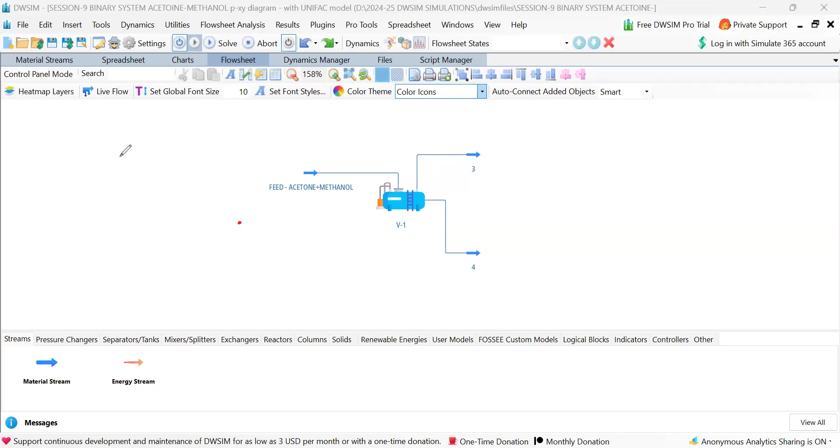Yeah, welcome again to this particular session on DWSIM simulations. Let me take another color here. In this session, we will look at how to generate the PXY diagram, keeping temperature as constant. So this becomes isothermal VLE, isothermal vapor liquid equilibrium.

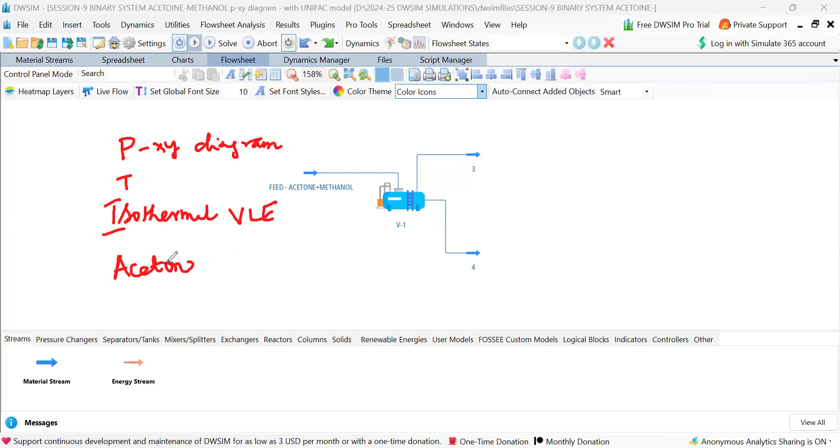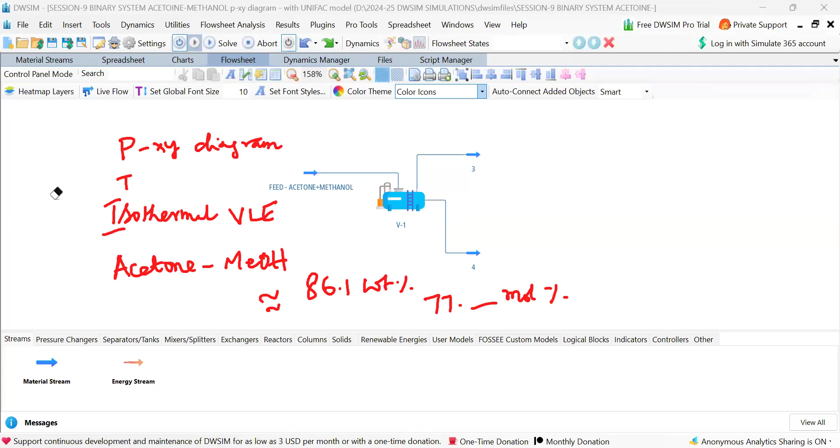In this, as you all know, the system we are working on is acetone plus methanol. This forms a minimum boiling azeotrope, as discussed earlier in the sessions, and the azeotropic composition came up to around 77 some mole percent. This we have checked with UNIFAC as well. Now, going ahead, let me erase these things here for clarity. Yeah, done.

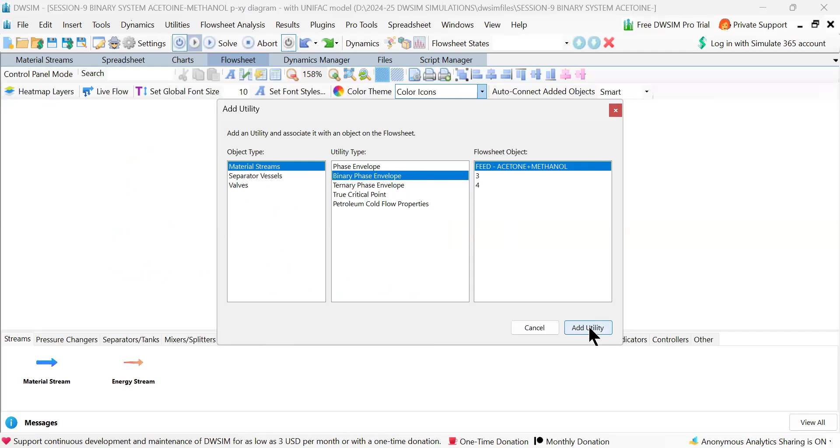Now let me go to utilities, add utility, material streams, binary phase envelope, and the feed stream. That is what we have to choose. Compound one is acetone, compound two is methanol, and we want to choose the PXY diagram. Now the temperature is constant, and the pressure changes and x and y are generated.

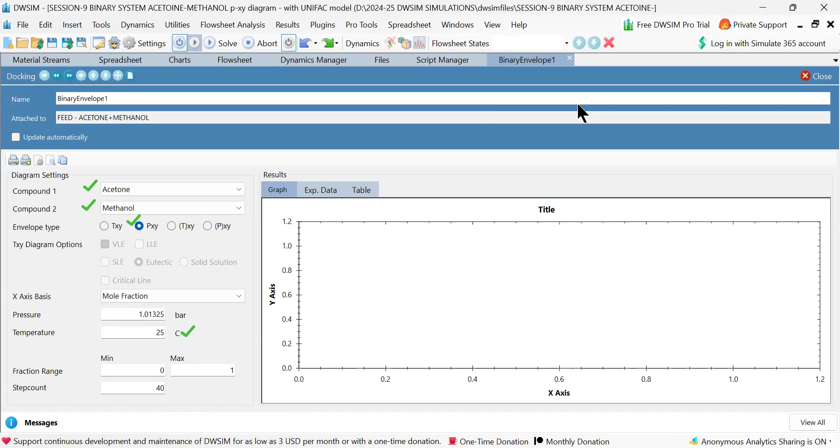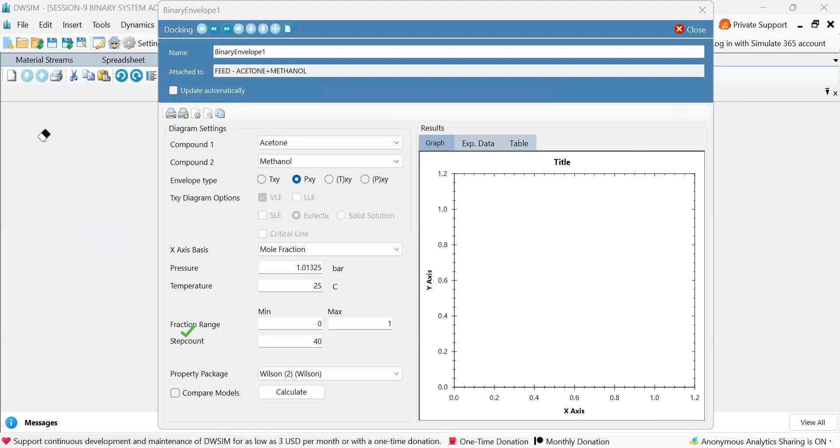Now, you want to see this whole window here. Let me grab out this binary envelope window. See, this is taken out. Slowly adjust this window, it depends upon the version. Now if I move this window up and down, at the bottom here, there is something called calculate.

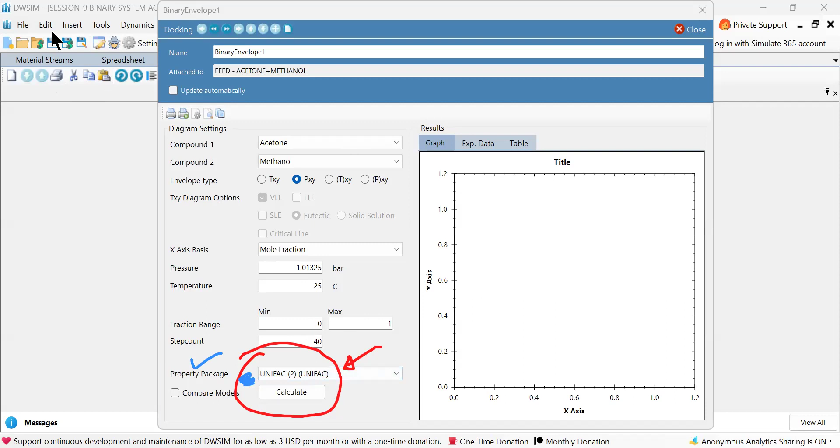In the previous session, we came up to selection of the thermodynamic model also. Not Wilson actually, we have to choose the UNIFAC model. So let me select the UNIFAC model because that is giving us the correct result as per the literature. So this is the property package, and now we are ready for the generation of the diagram.

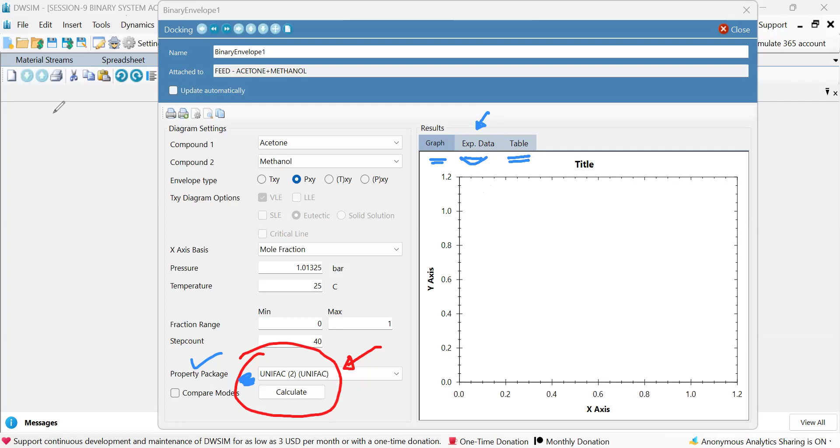And one more thing. After we generate this, there is graph, and experimental data. We are not having experimental data; we are generating directly from the model. We can also see the table. If you do experiments, you can give the data and then do some regression. Now, let us arrange all these things.

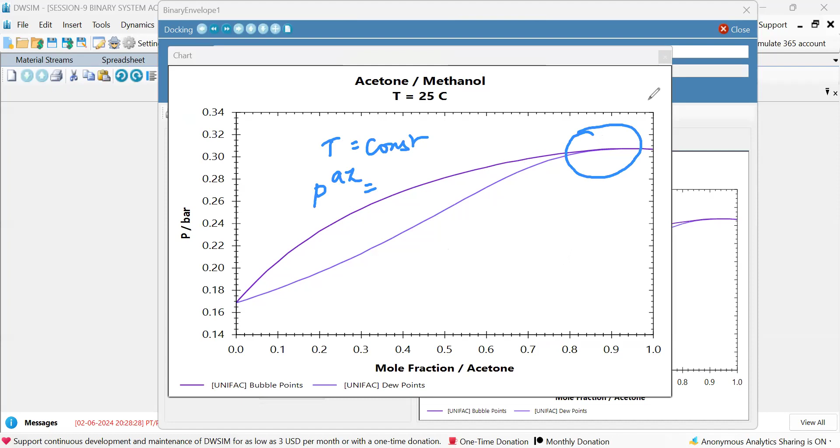Now, let's calculate. See, the curve is generated. If you want to see this curve in a maximized way, show it in another window. Somewhere here it is falling. The temperature is constant, and you are finding the azeotropic pressure. So now let me remove this. I think we have understood how to generate this PXY diagram.

Once this PXY diagram is generated, the next step is to generate the XY diagram. So I select this radio button and again we say calculate. See, it promptly calculated. Of course, every time you have to save everything. These windows and diagrams you can copy and paste in your Word file for reporting purposes.

So in this video, we have seen generation of the isothermal VLE. We have a liquid mixture, and for that liquid mixture, we are trying to generate the VLE data. From the thermodynamics point of view, you need to know the property package, and then do all these things.

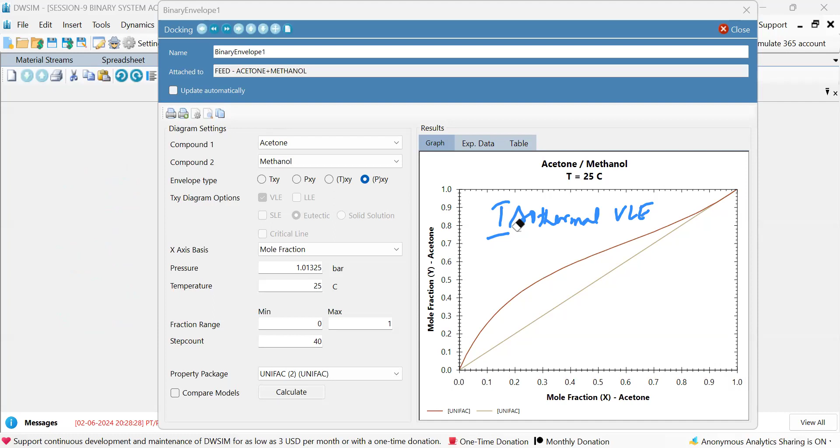Suppose we want to compare with other models, say Wilson, UNIFAC, or NRTL. We can click here and compare. See, Wilson is not working properly, so we should not take Wilson. Let us generate PXY also and compare. In the PXY data, both are almost merging. Likewise, you can select 3 to 4 models, create comparative data and report your observations.

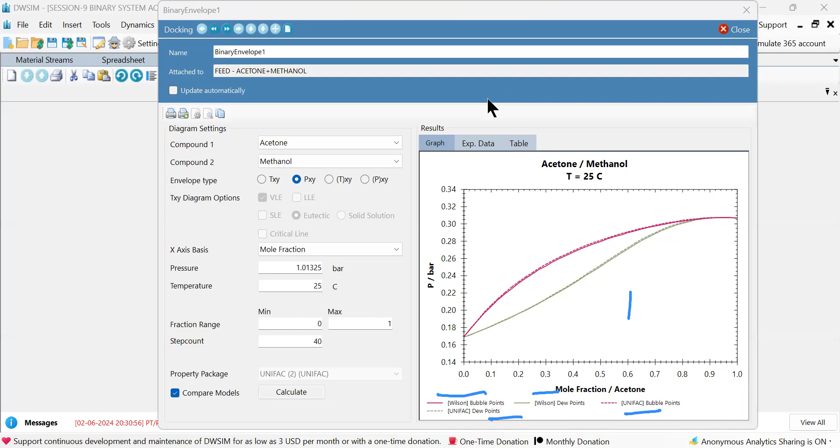Let us go to the next session and understand this more. The main intention is the separation of the system, but before going to the separation, we are understanding some things with respect to this azeotropic system.